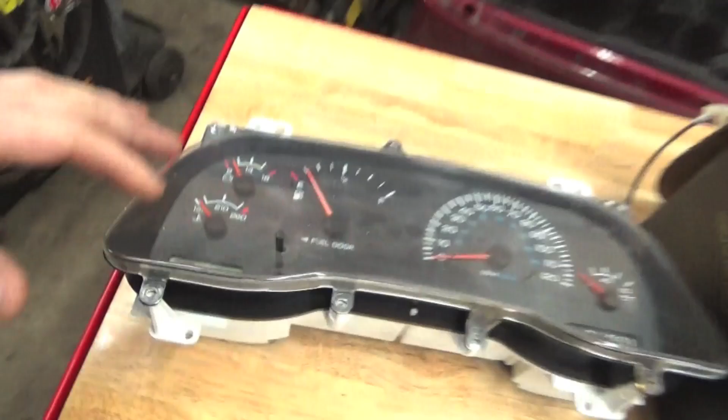Today we're going to be taking my 98 Dodge Ram 1500 twin turbo 5.2 liter Magnum drag truck, and we're going to be taking out that stock dash right here and installing these awesome Motor Meter Racing fully digital gauges.

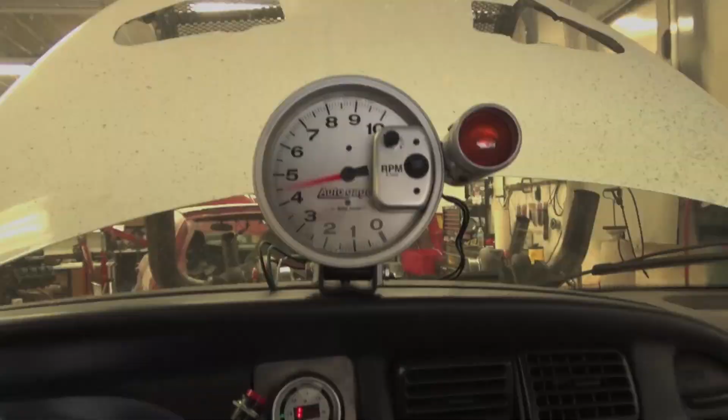We're gonna build a custom instrument bezel out of aluminum, and we're gonna mount these digital gauges. In our digital gauges we have tach, speedometer, coolant temp, oil pressure, battery voltage, and fuel level. Everything that comes in the kit is the actual gauges, plus all the sensors and wiring that we need to actually put these gauges in.

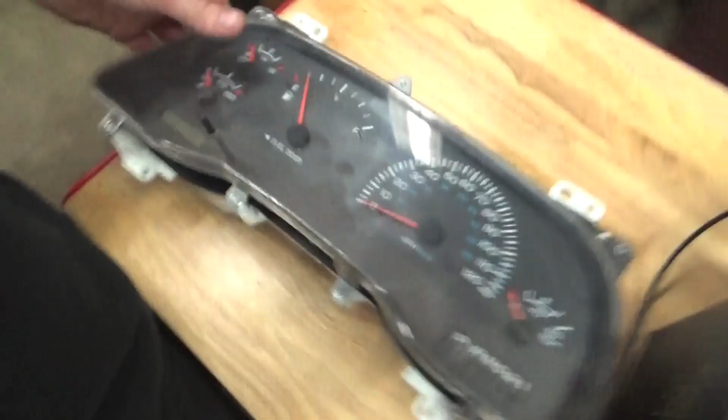We are going to mount them in the factory location, so we're going to be throwing this guy away and building a custom aluminum one to mount the gauges in our stock dash in our Ram, since it's in such good shape without being cracked. So it'll be right here.

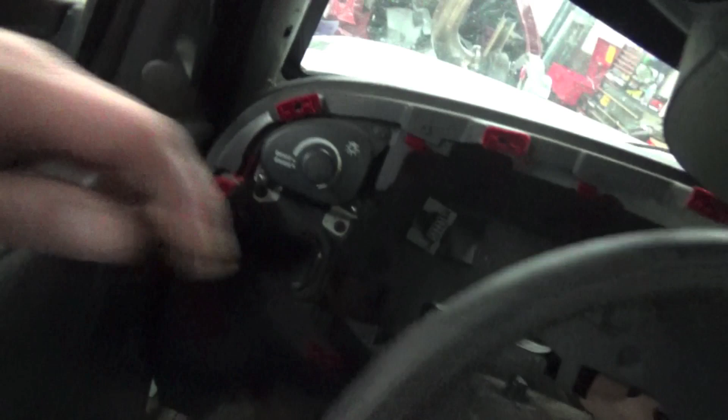A lot of the wiring will be super simple because we'll be just using the factory wiring that's already run to the cluster itself. We are running this because we have the MS3 Pro Evo on this truck, which is an aftermarket ECU, so it's not running on a stock JTEC engine controller. It is fully aftermarket. This thing is awesome, but we need some gauges.

So we're going to start this video in. We're going to get this plasma cut out, start lining up the gauges, start drilling some holes, and then we'll start wiring this guy in.

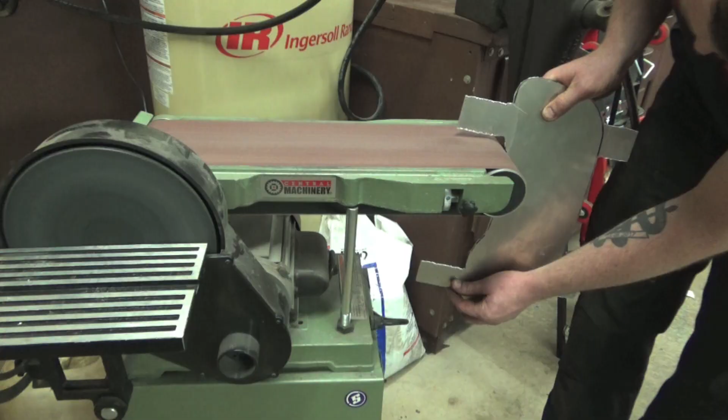Before I get too carried away with cleaning up the edges and stuff, we're going to lay out the gauges actually on the aluminum panel and figure out what order we want to do them in and how they're going to fit perfectly in here.

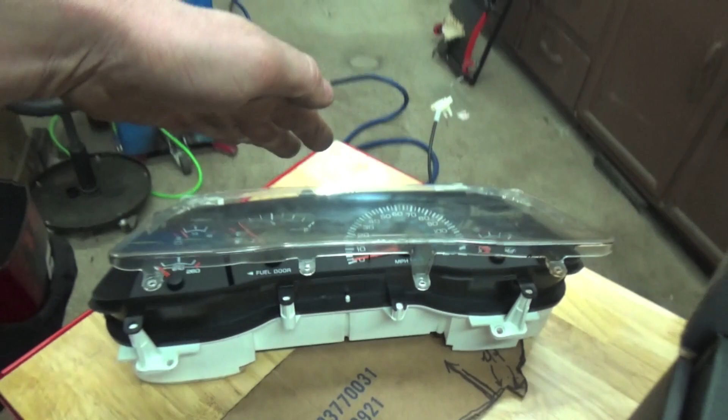These tabs right here will be bent, and bent twice, for the actual feet of the instrument cluster, because you can see how deep these are. And it's at an actual angle, not perfectly flat across. I want this to look as clean as I can make it.

So before I go crazy cleaning up all these edges and everything, we're gonna start laying out the gauges on here and figure out the order that we like.

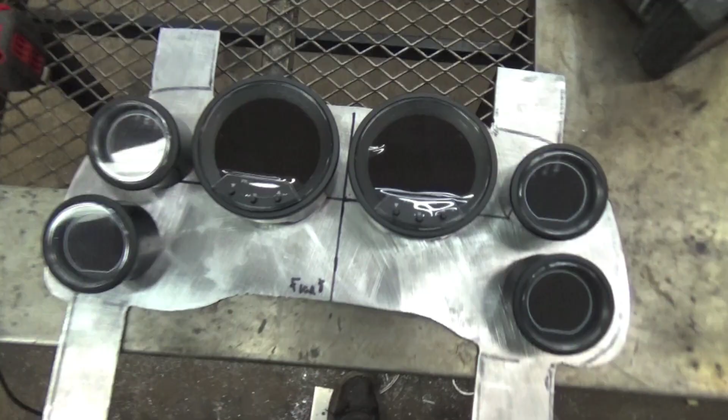So we got them laid out here. We marked center of the actual little dash piece we made, and we're gonna line them up. This is kind of how I think we're gonna do the order: we have the speedometer, then the tach, then coolant temp, voltage, fuel level, and oil pressure all right there.

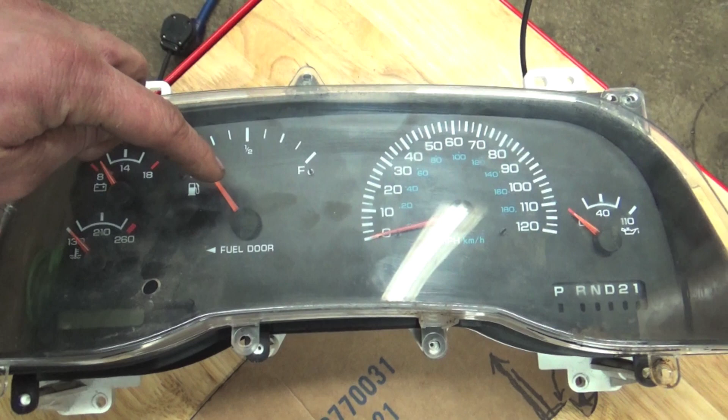So it's kind of laid out just like the factory one is, besides they have a giant fuel level gauge where the tach usually is, and then the fuel level gauge is usually small over here in the corner, and that's kind of how I'm mimicking it.

The most important thing is probably the tach. We do have that gigantic tach with the light on it too, but we'll probably be removing that tach. That thing's kind of obnoxious and huge, and we'll probably just run the sleek little tach right here.

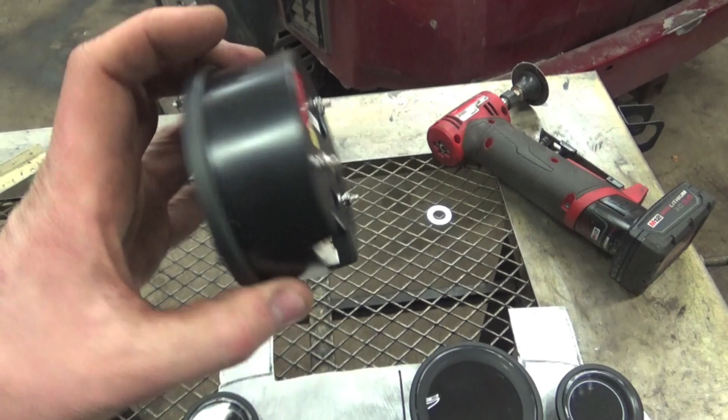One really cool thing about these gauges too is look how shallow they are. They're extremely shallow, so they fit perfectly in tight places. That's awesome because that'll make it easier for it to fit in there and not run into plastic in the back, and the less trimming we'll have to do because of how shallow they are.

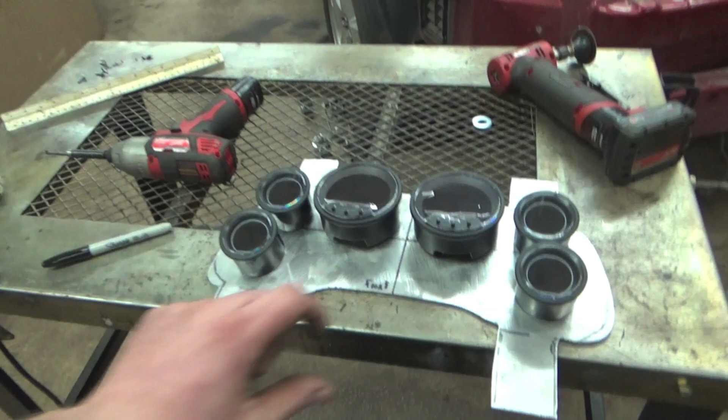I don't think we'll have any trimming to do, to tell you the truth, because they are such a shallow mount gauge, which makes it awesome, because usually you get those bulky gauges which take a ton of room in the back, but these don't do that.

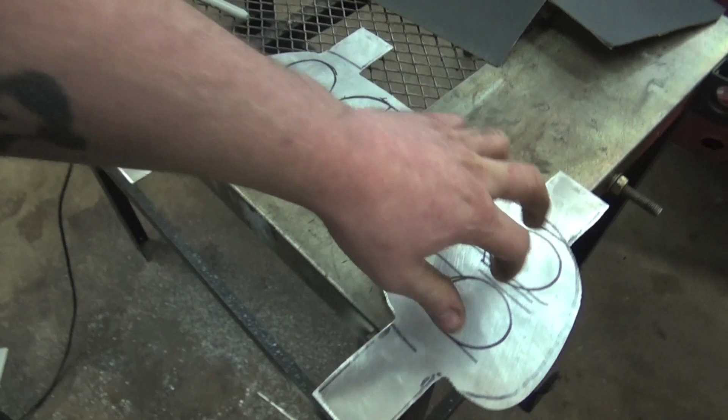The other awesome thing Motor Meter Racing has done for us is in their cardboard cutout here, they put the gauges in for display, but you know what works perfect? Lining it up. Those big holes I don't have a hole saw big enough for, so we're actually gonna have to plasma cut out these two big holes. These little holes we'll use a hole saw for, but that setup makes it ten times easier to make sure we have a precise size on what hole we're gonna plasma cut, so there's no guesswork, because we have all the sizes right there in the display with the gauges.

It's the little things, I guess, guys. It's really the little things.

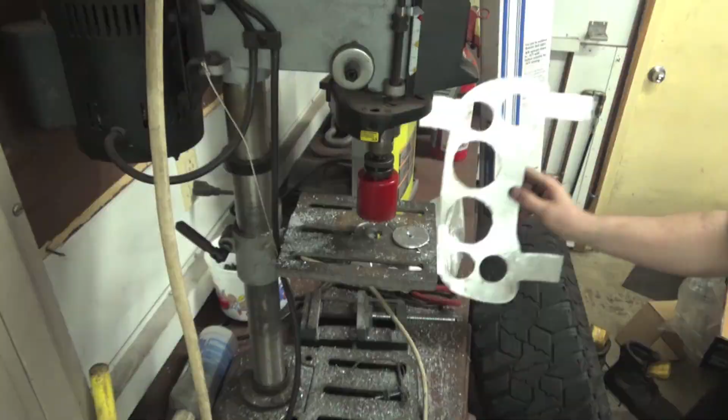So we just finished the one gauge on here, and look how sweet that looks, guys. I'm gonna sit here with my die grinder and get all these gauges to fit perfectly. This is like a perfect fit, and it's tight and is gonna work great. I'm pumped about that. That looks sick.

Look how beautiful this thing has turned out. That's gonna look sick in the dash of Whitey. I'm gonna be able to stare at some beautiful gauges the whole time I'm driving it, and I'm pretty pumped about that.

So we're gonna start bending these tabs now, drilling some holes, and getting this actually in the dash itself, and then we'll start wiring up these gauges.

The other cool thing about the speedometer is it's GPS based, so these gauges can go in anything you want - boats, cars, trucks, motorcycles, ATVs, go-karts, anything. It's an unlimited amount of possibilities. I think this would look pretty sick in my lawnmower.

No, it's gonna be awesome in Whitey, and I'm so pumped to have some digital gauges and actually be able to see like coolant temp and oil pressure. You know, we went drag racing. We didn't make a video about it because we didn't do too hot, but we had no gauges when we went racing, and we didn't know what the oil pressure was, but it ran the whole time, so who really cares?

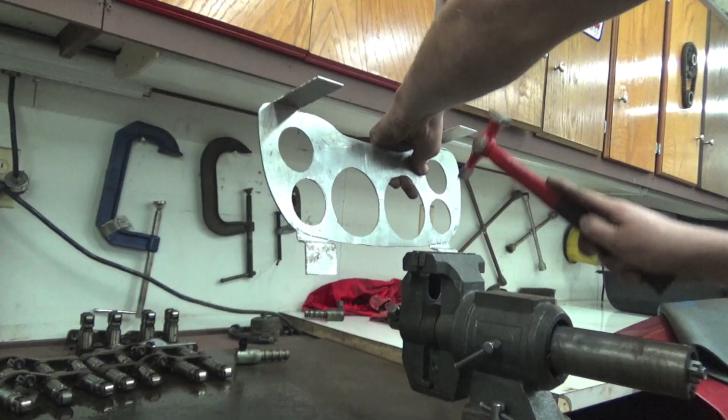Alright, take a look at that, guys. That is way too cool. That looks sweet. We should try putting the bezel on here quick just to see what it looks like with the bezel on. It's kicked out a little bit though because there are alignment tabs on this thing that we don't have the holes drilled for yet. But just look at that.

That's pretty dope. It matches our aluminum gauge panel right there, so it'll go great. And then we'll put an aluminum panel right here and this will be where our line lock is and maybe some other things.

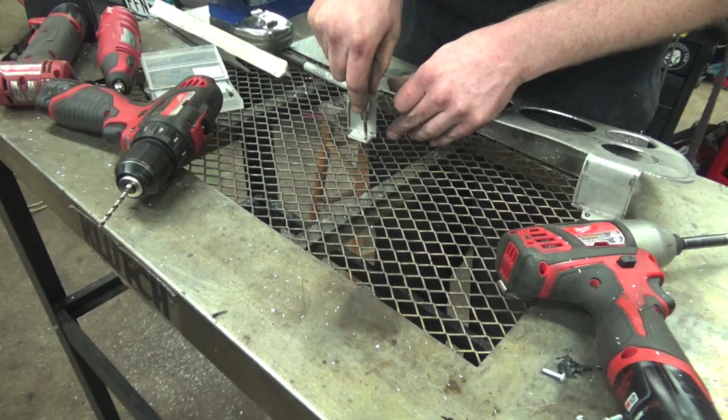So we got everything from this kit laid out right here. We got all our digital gauges. We have the mounts for the two big gauges. All the little mounts are in the actual packaging of themselves. We got a fuel level sensor, and we got a float for it. We got a GPS signal for the speedometer.

What else we got? Oil pressure sensor right there, wiring, water temp sensor and wiring, voltage gauge and wiring, the tachometer wiring, miscellaneous brackets, miscellaneous pipe fittings and adapters to get it to the oil pressure sensor and for the coolant temp sensor, more brackets, clamp-on mounts just in case you want to hang it on a pillar or something like that for the gauges.

We got all the gauges installed into our custom gauge panel that we made out of aluminum. We got the oil pressure sensor installed. You can see the wiring right here. The one that's supplied with the kit is perfect. It's 1/8 inch NPT, which the factory is 1/8 inch NPT, so it works out great.

But we do have all the gauges in place, and we do have the powers and grounds wired in. We just don't have the sensor wires wired in yet. But we did this big bulky connector, so everything's just one connector instead of all the little connectors on the back of the gauges. Super simple to install - power, ground, and ignition ground - but we do have our little test leads hooked up so we can see what it looks like when it fires up.

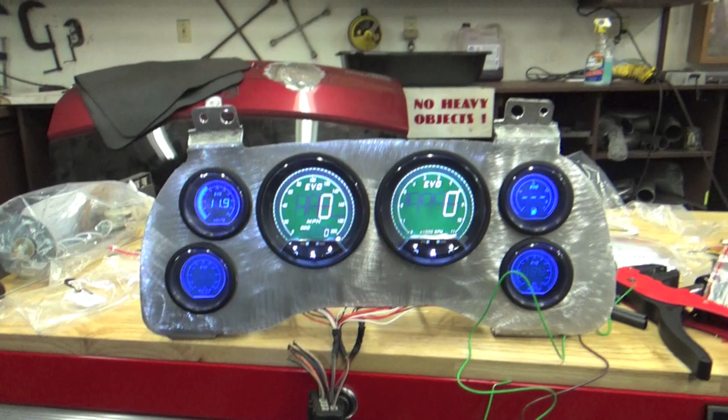Full digital gauges, isn't that sweet? Look at them. Well, the battery voltage is working, 11.9 volts. Of course our water temp ain't working because nothing's hooked up. Fuel level not working, nothing hooked up. Oil pressure, nothing working because it's not hooked up.

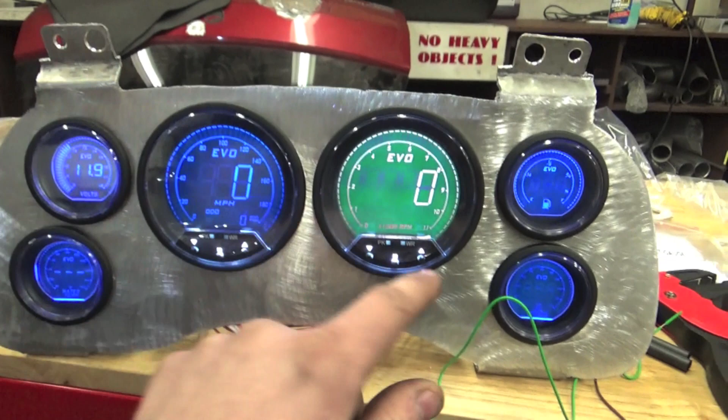Yeah, so here's our speedometer and our tachometer, but we can change the gauge colors of them. So we could do all blue to match, just like that. So they're all blue, just like that. They're fully sweeping, as you can see when we actually rev the RPM and everything.

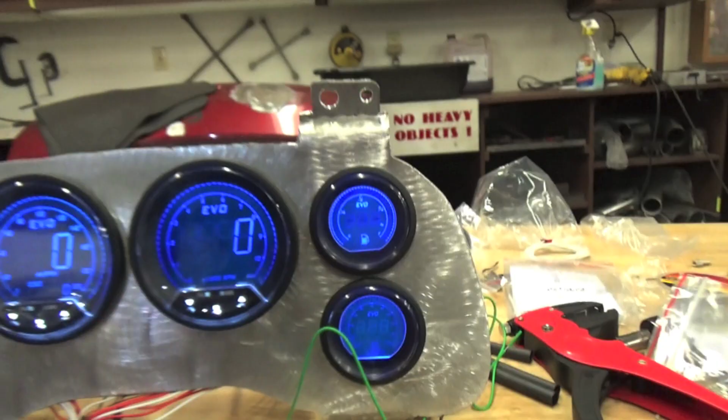We still have the protector shields on here, so if it looks a little funky, that's why, so we don't scratch them. So I'm gonna get this fully wired in and we'll get it thrown into the dash and we'll start up the truck and try them all out.

We got the GPS sensor. It has a magnetic base, and we're just setting it on our A-pillar for right now until we get the roll cage installed. We'll probably move that. I'll double-side tape it somewhere where it's gonna stay permanently, but for right now it's just gonna chill right there.

So we did a quick test fit, then pulled it back out, and I got it taped up so it looks nice and professional. On the inside, I did the same thing and taped it up.

The only thing I found out is our factory coolant temp sensor, because we're using it for the MegaSquirt, makes the MegaSquirt freak out. I'm guessing this puts out 12 volts, and the sensor grounds it, and depending on coolant temp it's a certain resistance to ground — whatever voltage is left is the temperature. So I think we're going to use this as a transmission temp gauge instead of a coolant temp gauge.

It came with a sensor, and we already have a coolant temp gauge. Whenever we drive this truck, the laptop — I'm going to build a laptop mount for it — has a gauge set with coolant temp, so we'll probably just use that and use this as a transmission temp gauge instead.

But everything else works, so we're going to slap this in and then start the truck up and show you guys what it looks like.

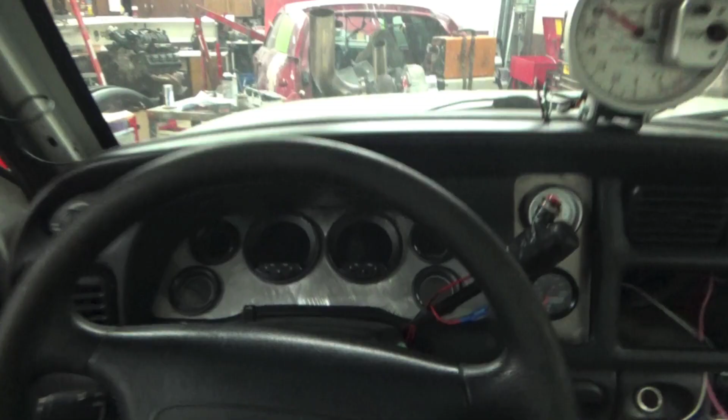Boom, they already look sick without even turning on. That looks so cool, like a freaking jet airplane. Because we're going so fast with Whitey. Yes, we have it set to 6500, shift light too. But yeah, let's turn the key on and actually take a look at these gauges.

Okay, that's pretty sick. You can see our fuel level gauge is working, 22%, 23%. Our water temp gauge, again, we don't have it wired in so it's not on. 11.7 battery voltage, 0 PSI of oil pressure because it's not running, 0 RPM, and 0 miles per hour.

So let's get this baby fired up, laptop hooked up, and let's fire it up and see if she works.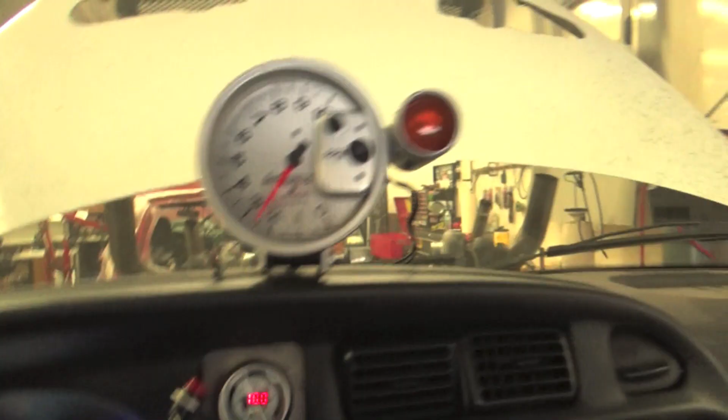Oil pressure, she's good. Alright guys, I hope you like that — rev up a Whitey. These gauges are sick, they're actually really sweet, like fully digital, and that's so sweet.

We will go back and adjust the actual tach output on the back of it — we must have it set to the wrong one — and get it down to the accurate setting.

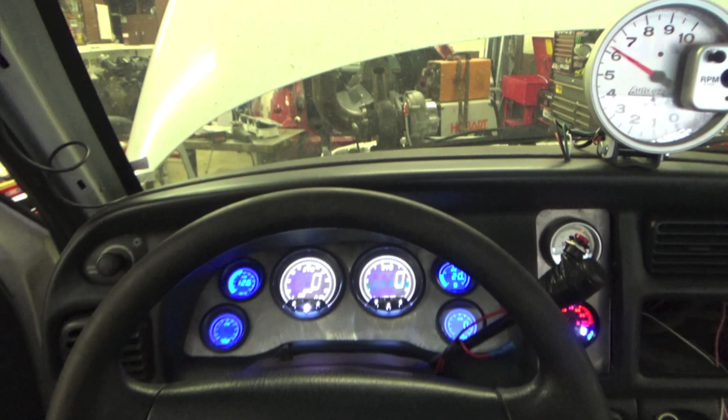They look sweet. I mean, how can you not love that? That is 500 times better than the factory dash. Look how sweet that looks. This is the angle I look at it when I'm sitting in the seat, so you guys can see how awesome these are. And then they turn red when you turn the lights on. I think that's just so cool.

And I'm so pumped, I'm so ready to go racing. Whitey's sounding like a beast, he sounds like a monster.